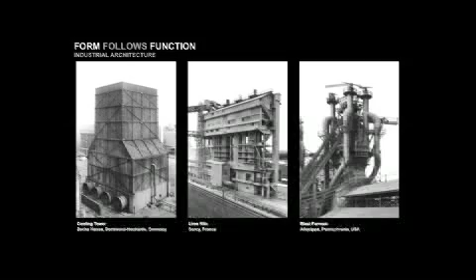Going back to the previous slide, of course all these buildings are great examples of their type, and they're all heritage listed—significant pieces of architecture in their own right.

Now the modernists rejected the function-following-form idea and created the notion of form following function. Corbusier and Gropius looked at industrial architecture and other broader architectures, like marine architecture, and saw another proposition. I think it was Louis Sullivan who first coined the phrase, shortened into 'form follows function.'

Gropius and the Bauhaus championed it, preoccupied with clean, efficient buildings—a functionalist aesthetic. These are just a set of examples—they could have been any of the great modernist pieces: Mies in Illinois, Corbusier's Assembly Building in Chandigarh, Aalto in a later building where you can see overt expression, a stair gets expressed and becomes part of the aesthetic, the simplicity.

What happened was, while they rejected the previous Beaux-Arts position, over time the modernists developed their own distinctive vocabularies about their own forms and materials and the way they expressed them. That got us to Venturi, who proposed it didn't have to be either/or—it could be both, which is the point in time in which we operate. The guilt that form had to follow function, a modernist idea, is no longer. We don't have to carry that burden. We can be willful and play with form, but we also want those forms to have some functional origin.

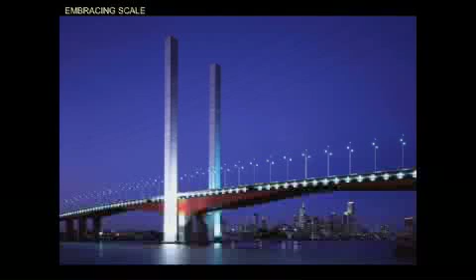At the simplest, a stair balustrade could be made of 3 sticks, as we did at Emery Vincent's office many years ago, and a bunch of sticks - 30 sticks could form a gateway to the city on the expressway. And at the grandest scale, 120 metres, they become markers. This was, of course, on the Bolte Bridge.

We were invited in. The bridge had already been designed by engineers. We were told you couldn't question any of the basic engineering. All we were asked to do was come in and give it something more than the engineers could do, dress it up, as it were.

So we did that in simple terms by overcladding to give it a different shape. We put an edge to it, a folded edge. But the big sticks were really about its place as a bridge. It's a vast span across the Docklands basin, and it had to deal with the scale of the city, and the bridge didn't do that as a horizontal - the sticks did.

They form absolutely no functional purpose in engineering terms, so we deliberately displaced them. They have no connection whatsoever with the actual bridge structure. But their functional purpose, if you like, is highly symbolic to the notion of entry, arrival, gateway, city.

And then, of course, the stick - the beauty of the stick is it can take on any size, so we can work it as an element, and it's perfect at 120 metres. And I guess this is our smallest stick to date, which is a handle on an Alessi espresso cup, because espresso is only a few shots of coffee, so you didn't have to deal with burning your fingers. So the stick actually works surprisingly well.

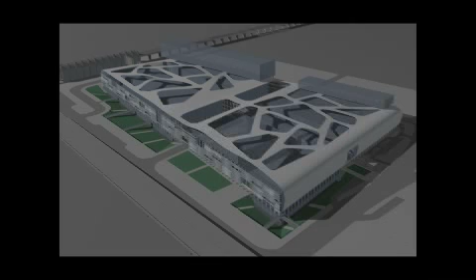An alternate on the web - a very large shopping centre in Beijing, about twice the size of Chadstone, which encompasses four city blocks out on the Third Ring Road.

The client wanted to use the roofscape - he wasn't happy with just the nearly 200,000 square metres of space within the buildings. He also wanted to use the roof space, which was above the permitted height limit. So the solution was to give him a roof web which satisfied the planners that we weren't really building and occupying above the height limit.

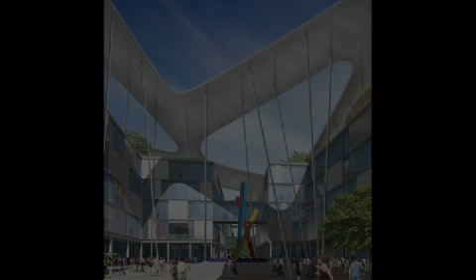Within that, small pavilions inhabit the space, creating indoor-outdoor activity, so he can commercialise his roof. The experience down below is this fantastic scale of web, made up out of metal panels held in place by incredibly thin sticks. That one is nearing completion.

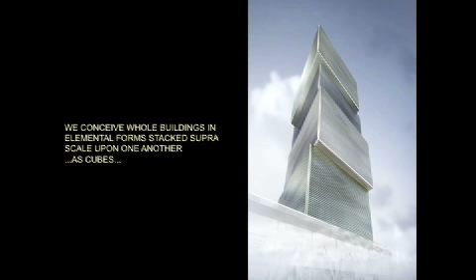Another idea in terms of building form - that's very much about elements that make up buildings, but of course the form of the building itself could be as simple elemental forms as well, in this case stacked supra-scale upon one another. Here we see a high-rise tower proposition for Asia, a commercial tower, a set of cubes that stack and offset.

Another one in the Middle East, an invited competition, where the brief was that the client had in mind to build a large, very tall office tower, but he wanted it to, in effect, be a series of somewhat discrete buildings so he could rent, lease or sell the space to individuals. So one corporation, say the Hong Kong Shanghai Bank, could have that as their individual building in the sky, and others similarly.

So there were direct lifts to these individual buildings, making for quite a complicated, fragmented form.

At a simpler scale, and built in Jakarta, a hotel has a set of cubes stacked at the top, which become the public spaces in the hotel.

The Census Building in Melbourne, part of the QV site Rob showed you earlier, where the entrance became a series of boxes that mark the entrance. Up in Brisbane, the Brisbane Square Tower was very curious - it wasn't willful on our part to create one form and then push another back; it was an absolute direct response to the client's requirements.

The shaft is another version of a stick, but you could obviously make a building out of that, which we've done. That previous drawing has been built in Hong Kong, one of those amazing little finger towers, which is only a 190 square metre floor plate. We thought in Wan Chai, where you get these tiny little lots, and you find similar sort of buildings in Tokyo, extraordinary buildings.

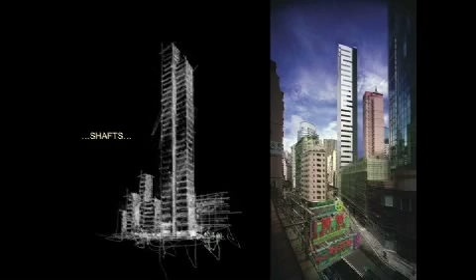That has a beautiful slenderness to it, so we thought, why don't we accentuate that even further by breaking it into two shafts, so they look like two little buildings held up against one another. A version of stacking shafts.

This is mid-range sort of housing, not big budgets, in China, where we simplify the housing stack. It's the perennial issue, as Rob talked on, of that forever repeating nature of residential just stacked on top of one another. But perhaps the most poetic idea for the notion of the big shafts is our building 4 at the brewery site.

I think this is Rob's building sits here. We won the competition for the large tower as part of this site.

Its significance really in Melbourne, it's on the axis, the famous Swanston Street axis, which continues down to the shrine. It used to be the joke about Melbourne that the whole city could be summed up in the shrine at one end of the whole city was based on a formal axis with a shrine at one end and a brewery at the other.

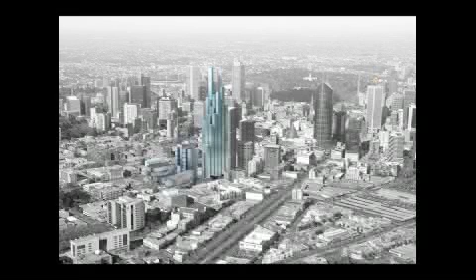Now the brewery is gone, but the debate was, should the axis be closed? Should it be open? Should it be infinite? The city grid, Hoddle's grid, runs that direction. The Carlton grid takes a twist and runs in a different direction.

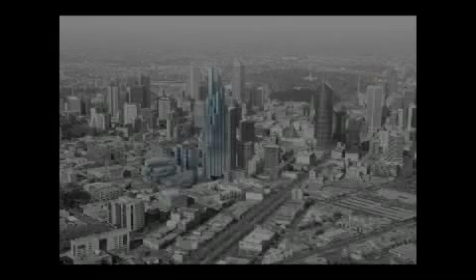So in fact the axis sort of peters out into the Carlton grid, and Rob and Debbie's building will be a low marker. From the other direction, there is an apparent marker.

We put the proposition that it was inappropriate to put a commercial building of a developer as the end marker, as much as the brewery once existed—there's the old joke. It really was inappropriate to mark this ceremonial axis with a commercial building.

However, by putting a very tall stick, from a distance it will be the apparent marker, which appealed obviously to the ego of the developer, that he could do that and also be responsive. So there's the axis continuing up between the slot of the building in the centre that's proposed.

And the beauty of this form is, in planning terms, it creates a lot of corner offices which are highly sought after in fit-outs.

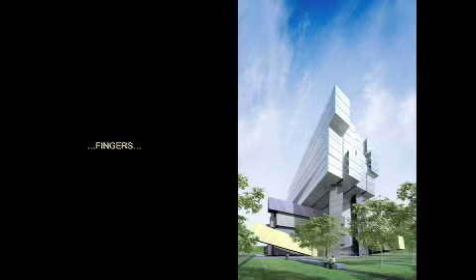The finger is another variant of a horizontal version, but you could stack them up. And the fingers in Brisbane Square, now we're looking at the bottom side. In the podium, the City Council occupies their offices, and then all their community services are in the podium with retail under. So the notion was to express those community uses and invite and engage the public via these very vibrant coloured fingers.

A little one with a little bit of analysis, a project in Beijing. This was the building control envelope—rather unpromising, a bit stumpy, broad, had a curve, had a fall across it.

So the strategy was really to break that up into a set of fingers in plan. They then stepped to deal with setbacks on the curve and propped in and out to create entrance points, etc. Take that notion, stack it vertically.

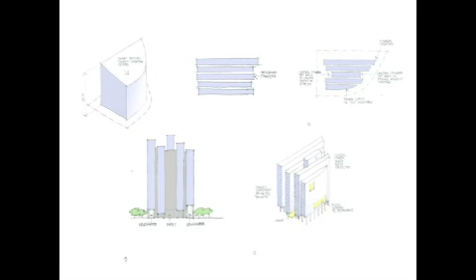Again, they step to deal with height, lift them off the ground to allow covered entry, and then put them together and put some larger urban windows into them.

And that's it built, the fenestration to get around the perennial issue of offices where they demand a certain amount of glazing, which on your facade creates the classic sort of stripes that you see all over office towers around the world. We were able to use two glass types, one very dark and one silver reflective, such that the silver reflective one looks very similar to the panelling and gives the illusion of these incredible little slot windows.

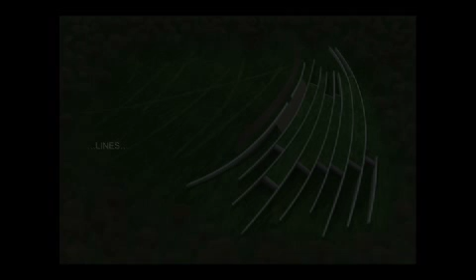Lines is something that we've engaged with in the landscape. This was our first proposal for the visitor centre at Stonehenge, where we buried the centre. The actual stones that form the ring are really quite delicate in scale, quite monumental because they're massive pieces of stone, and they sit out on the Salisbury Plain where it's virtually flat without trees.

But in scale terms, they're about that size, and this is the visitor centre, which was much larger, although at a distance. So the proposition was to essentially bury the building, put it in the landscape, and make no reference whatsoever to the notion of stone. So these were to be zinc-clad plates that you moved through and then went on to experience the building.

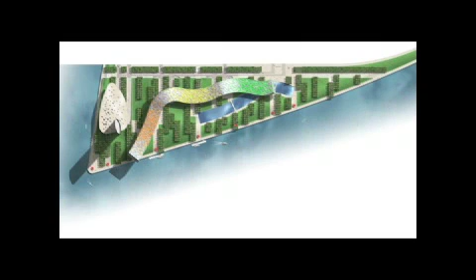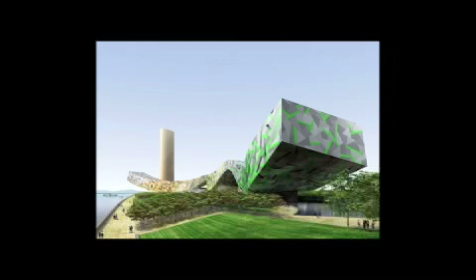Ribbons. This is a competition we did in China for four buildings: a library, a concert hall, and a museum gallery with a large exhibition hall. The idea was to link those civic buildings into one and create an undulating ribbon, a dragon-like form. The library proper occupied a zone here, overclad. The zone in between is really just a large porte cochere with a simple space frame, also overclad, and then you have the concert hall and museum gallery with dramatic cantilevers on the end. We won the competition, but then it went up to the mayor, who gave the job to some of his cronies, which is often the way in China.

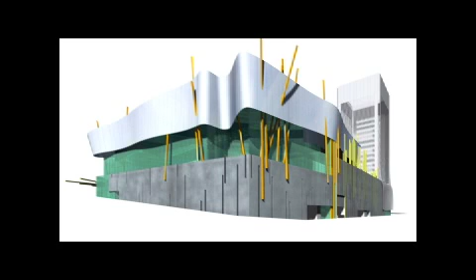A variant of the ribbon idea, a shopping centre in Bondi Junction, breaking down the big box typical of shopping centres, getting some glass into it, and enclosing it with a ribbon-like cladding.

Ribbon form in housing, China.

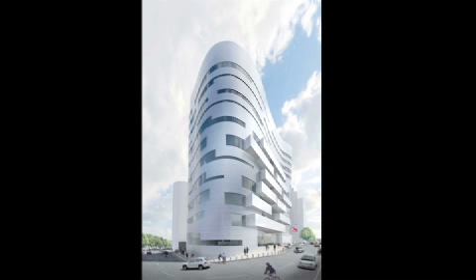This is a job we're currently working on, the new law courts, criminal courts in Birmingham. A difficult site with a brief that needed to occupy a lot of it - specifically a difficult shaped site. So the end solution was a ribbon building with some expressed boxes that accommodate some of the meeting functions.

A couple of other preoccupations: we really enjoy challenging the limits of gravity, which we did with the gateway, sometimes called the big cheese sticks. I guess we had in mind more the boom gate that lifts up and down. It's an 80-metre cantilever - a square hollow section which is inherently very structurally stable. All it needed was a large concrete anchor set into the ground to hold it in place.

Similarly, the sticks, which are from memory 15 or 18 metres, use the same principle. The beauty of designing these, which we discovered on this sort of freeway work, is that they're experienced largely at 70, 80, 90 kilometres an hour. So it's not static design in the way you'd experience most buildings - it has to be very broad gestures, really very simple. I think freeway walls and things that don't work are where they get far too delicate and busy. They're big elements.

And here again, for more variations, balconies jumped around in China. This is the Olympic housing proposal. We have a portion of it for Lend-Lease for the London Olympics. Lend-Lease wanted, the original brief was, it was all to be made out of precast from Eastern Europe.

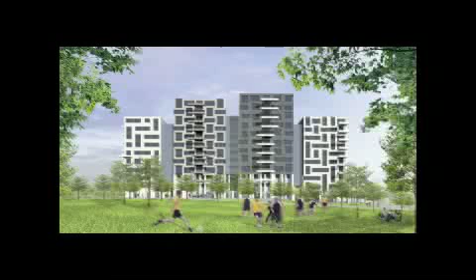And it's very simple housing. It's actually quite small units. Each one of those represents a unit, and it had to conform to all the developers' requirements of repetition and so on. We weren't able to persuade them, as in QV, that you might do anything else.

They're fairly hard-nosed developers. Anyway, all we were able to suggest was within that precast system, by changing colour, you can then start creating other patterns within the essential grid, which is the housing. And so you can get differentiation. Balconies can be stick-like elements.

There are lifts, of course, in this, and we said we could enclose the lift with more sticks on the top, but if you don't like them, they could go. So I don't know if they're in or out at the moment. So look, that's that notion really about formal pursuits.

I'll just pick up on a couple of other ideas, because our architecture is informed by many other things. Now, we work all over, like many practices nowadays, we practice globally. We're in many different cities and locations and countries. And all those individual cultures and contexts are always a point of departure in our schemes. We largely designed from Melbourne, our head office, where we have what we call a design cell. We do that because over time we've had different regional offices, but we've really found to maintain the design quality control and maintain the standards that we want, it's better to centralise it.

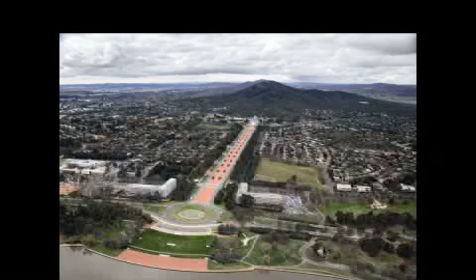All right, well, I've got a few projects in here which I will illustrate how they are very specific responses to their cultural and contextual situations. This, of course, is Canberra. Griffin's Plan, the land axis from Mount Ainslie across to Parliament House, Anzac Parade, and the War Memorial sits at the end of it as a marker. We've worked with the War Memorial now for over 20 years as a client.

The first building we did was a small administration building. The original 1930s building is actually quite delicate in scale, although it has a certain monumentality because of its design, with very small openings and windows, and so it's hard to read the scale until you get up close to it.

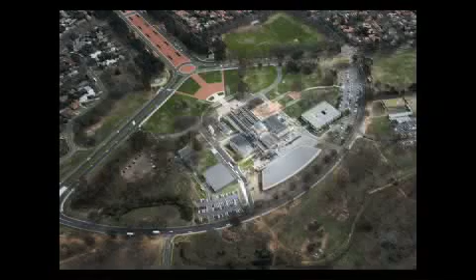So the admin building was deliberately descaled. It was a 3-storey building. By berming it up, it then appears as only 2 stories, and by making the openings from a distance appear to be large single openings, it actually looks like a single-storey building. You can see the scale of this building, which again, in a different way, has small openings, giving it its apparent monumentality, but it really is only a sort of 3-storey building with a dome.

So this was a particular contextual response to make it recessive. The T-sections, all out of steel, were clearly referencing the memorabilia held within the memorial. We opened up the original quarry and cut the same stone. That was done back in the 80s. This one, the Anzac Hall, was completed 4 or 5 years ago.

A very large exhibition space which has fighter jets, submarines, very large objects in it. It had the potential to really dominate, again, the War Memorial. So it's submerged into the landscape, it's bermed, and it's expressed as a very simple wing-like stealth bomber form that has a blade wall that really just, from the axial view, sits as a backdrop. So again, deferring to the original.

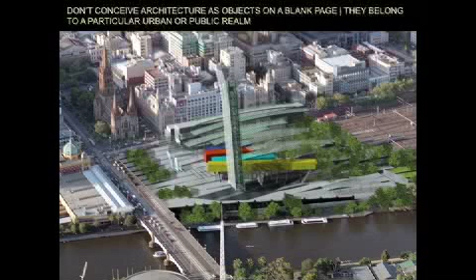Some of you wouldn't know this, but this was we were on the shortlist for the Federation Square competition, and this was our proposition. The point I'm making, as per the caption, is that we don't conceive architecture on a blank page. They really do belong to their particular urban or public realm.

In this case, the site always had contours that ran up from the river edge back to the city, and we reflected that in the forms. There's a reading of those contours which allowed us to deal with the gradient up. We proposed digging out so you drop down and are able to pass through the bluestone arches.

Then in more recent times, the tracks and the lines of the tracks are expressed in the architectural form, a series of fingers, a series of these folded or curved glass plated roofs. A very large part of the competition brief was for a garden, and so we brought the park in through the building.

Now, curiously, in the LAB scheme, that requirement seemed to drop out of their proposal. However, that's how we engaged both of those, and then we took one of these forms and turned it into a big vertical marker, which was to become a viewing platform. So Melbourne didn't need a wheel. They could have had their own viewing tower.

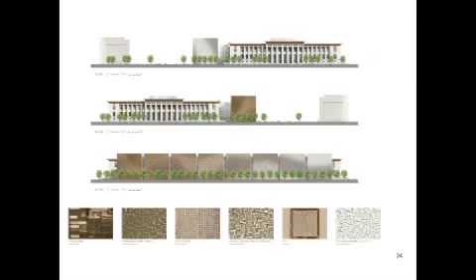Our proposition, without going into great detail, was 8 cubes. 8 is a very propitious number in Chinese culture. A museum, by its definition, does not want a lot of light, so solid forms were ideal, with windows in the re-entrant breaks.

The idea was to clad the forms in metal sheets of 2 types, titanium and bronze, broken down into a grid system that had a language of strokes you can get a hint of here. Within a single grid there were 9 possibilities, and by rotating those horizontally you could get a pattern emerging, and by manipulating the combination of how many strokes of one colour or the other, you could get these webs, textures emerging.

The notion was that the end cube, the southern cube, would be mostly bronze, and then progressively more titanium dashes, which talked about history and the notion of movement through time. Titanium was obviously a material of our current era, and bronze was something to do with the past.

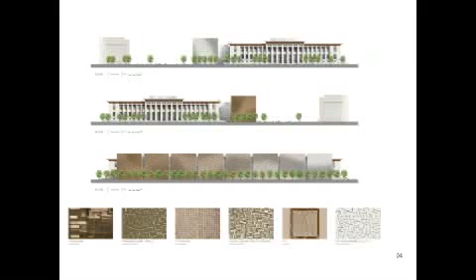And of course they had references in a variety of things. The first typography invented in the world had this wonderful pattern and wonderful colours. Chinese calligraphy has all these characteristics, but so do microchips in computers. So museums of history are not just about the past - the present is history in the making. That was some of the cultural references we tried to embed within that scheme.

Here it is - very simple forms, Platonic forms.

And it had all the banks and the primary government buildings of its time.

The proposition we were involved in was a competition, invited competition - well, consultancy really - with SOM from San Francisco, Portman's office from America, a German practice, and ourselves, to come up with proposals for the extension of this, what they called the South Bund. An area roughly the same size, we had to come up with a master plan proposition which then became the development controls, and the site would be sold on to a developer.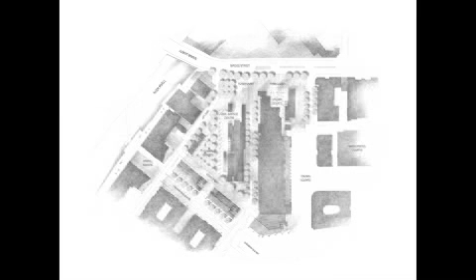This is the Manchester Civil Justice Centre, won in an invited international competition against Richard Rogers and Pringle Partners from Manchester. The site is a triangular piece of land in Spinningfields, an old industrial regeneration zone.

We often think that one good idea, one big idea, is probably enough to hang your whole architecture around. In this case, our proposition was that anyone going to court is usually in a certain state of agitation and stress. You don't end up in court unless you're stressed, and that's for both parties. So you want a building that is as de-stressing as possible, i.e. it needs to be highly readable, clear, legible. You can't get lost. There aren't dead-end corners. You know where you're going, you know where you should be.

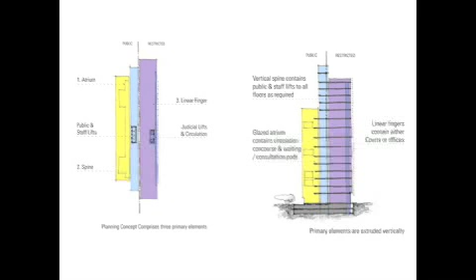So that was the proposition: there would be a concourse, a circulation zone, a public zone. There was a spine that had lifts and all the servicing, and then there were the courts proper, with a judicial corridor by which the judges come. That was the plan, from the original competition drawings and submission. Then that extruded itself in section, where the yellow zone, the public space, only had to go to a certain height, then it was offices above, the spine, and the court fingers.

And there it is, built. So that plan that transformed itself into a section is essentially what got built. It's made up of a large glazed screen. In the atrium space is occupied by a series of meeting pods. The public concourse, the spine wall, has all the servicing. You move through, and the courts.

There's 52 courts, varying inside from a tribunal, which is a very small room, to a super court that had, for large commercial cases, up to 30 solicitors and barristers, and the mix changed over time. We said our form can accommodate that. The fingers can grow, and in fact, as the plan developed, they did.

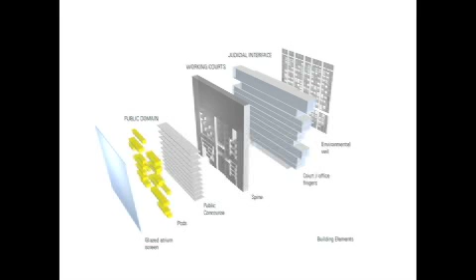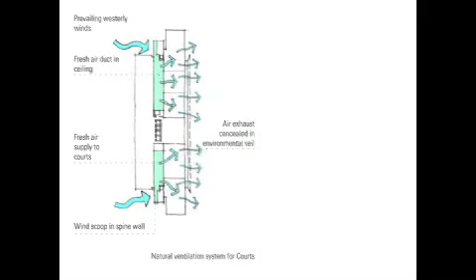And then there's what we call an environmental veil, which was all part of a very ambitious environmental strategy, which was to have a mixed mode ventilation system. 80% of the year it's naturally ventilated via prevailing winds that come in through wind scoops on the end of the spine wall into fresh air ducts that passes through the courts. They're in these vast ducts.

It had to get a specified BREEAM rating. To achieve that, it had to be low velocity air, i.e. we couldn't mechanically assist it with fans or we'd lose points in the rating system. So there's this massive duct, 2 metres by 6 metres, with very slow air moving. It comes out of these ducts through the courts and expels itself out.

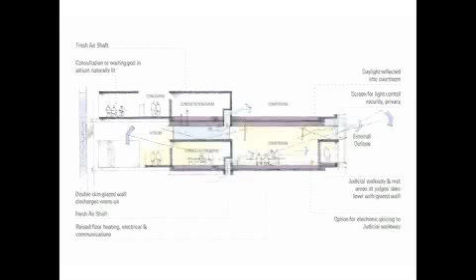So there's a whole series of louvers, hence the environmental veil is a device for screening that. We were able to get, by holding the judicial corridor down low, natural light into the courtrooms themselves. This is one of those courts in the fingers. So you get views out, light coming in from above, and ventilation coming out of these points in the floor. It's gone on and won the RIBA National Sustainability Award on top of another 20 odd awards. It's been an extraordinarily successful building.

Here we are in the atrium. There's a double wall construction, so it's a double glazed unit, albeit blown up to 600 wide. One of the advantages of that is you don't have to have the black spacers that you typically find in double glazing, so it has extraordinary transparency that you lose once you use the standard double glazed unit.

You're in the atrium looking up. These are some of the pods that occupy it. It's a fairly tall space, very high floor to floor because of the various requirements. So to avoid any sort of vertigo effect, it's occupied by the pods, some of which have one of our signature colours.

And that's the last image, which finishes it. Thank you.

Thank you, Adrian. Sorry about the technical difficulties. That was certainly a great reminder of how much impact your firm has had on the city of Melbourne and its character. It's great to see that character being spread around the world in all those fabulous projects.